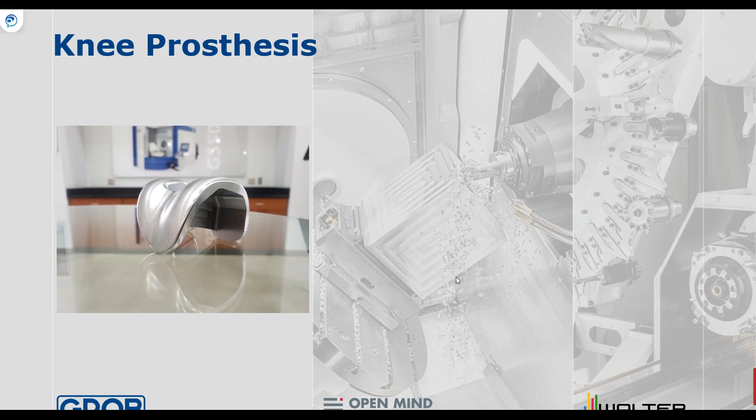For those of you who don't know GROB, we're a German-based company, still family-owned. We have 5 production plants around the world. In the U.S., we have a plant in Bluffton, Ohio, where we have close to 600 employees. We started in Bluffton in the early 80s. At the beginning, it was a small sales and service office, and we've grown through the years to where we are today, which is a full manufacturing site that builds our complete product, all of our product lines that the GROB company offers. Here you can see the overhead view of GROB Bluffton.

It all starts off with sales and engineering. When we get into projects where we require specialized solutions, which is really what we're known for, that's where it all starts in engineering. We have a staff of mechanical engineers, fluids, electrical, software, who all get the project started.

Then out into the plant, we have a full production facility, which is actually fed by our apprenticeship department, which has been in place since the beginning. We actually had one of our biggest classes about 2 years ago with 40 apprentices in a single year. In our production facilities, we're doing all machining, fabrication, painting, so everything from the start to the end, including assembly. We have an application center.

For those of you who are in the medical industry, we realize the long process it takes to get through that verification process, and we have application engineers in Bluffton to support that process. We also have a service team who knows our machines very well. They've built our machines from start to finish, and we recently expanded our spindle rebuild facility in Bluffton.

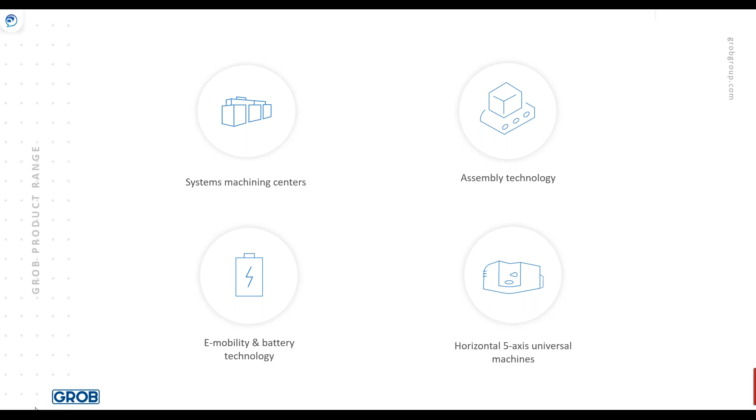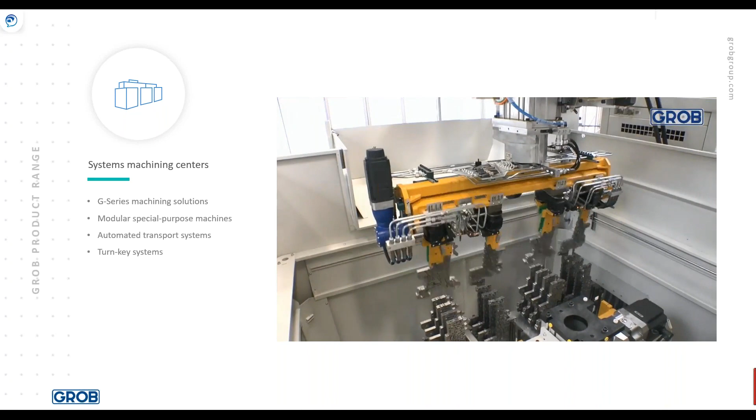Briefly about our different product lines. Our traditional heritage is the system machining line. This is mainly for customers in the truck, tractor, automobile business, mainly powertrain components or suspension components, where they come to us and say, we need X number of parts per year, usually in the tens of thousands to hundreds of thousands of parts per year. We design the complete system from the machines, which can be double spindle or single spindle, any special purpose machines, automation, the turnkey down to the fixtures, the tooling. We will engineer and design all of that.

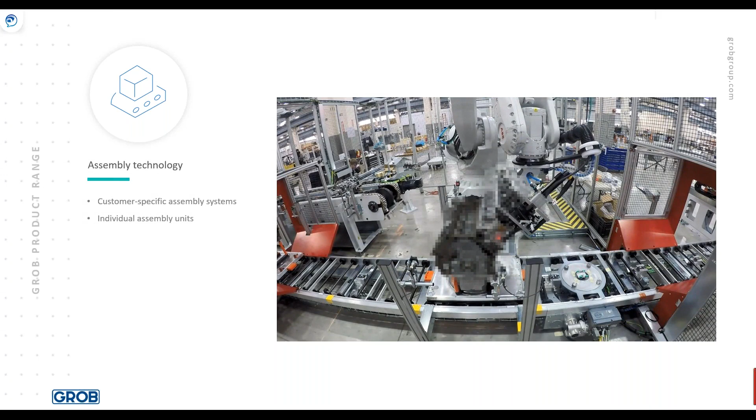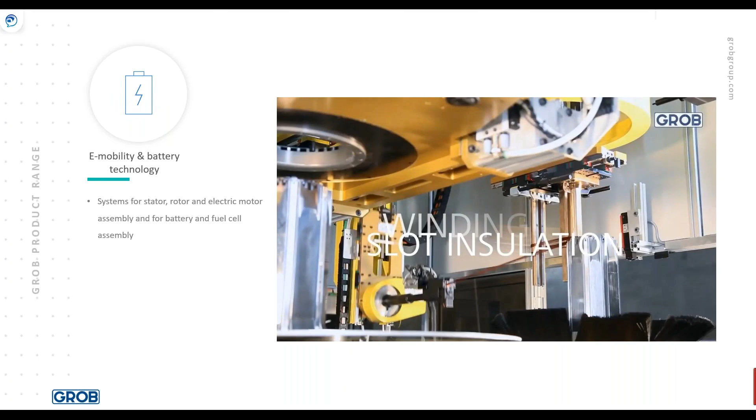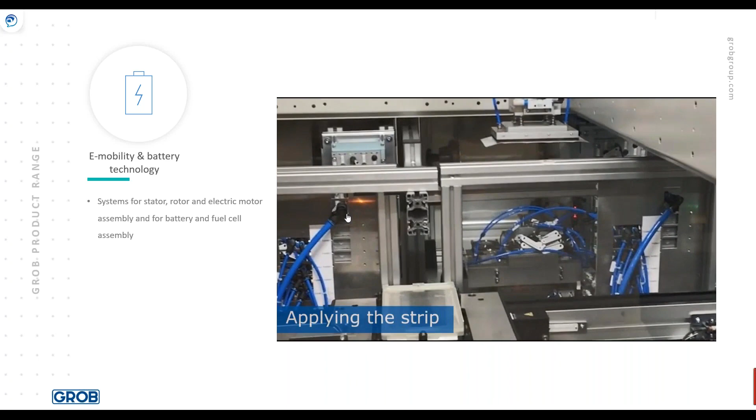That really goes into our next product line, which is our assembly technology. Typically, if you can machine a head or a block, you can assemble it. So it's a very engineering heavy product line that we support our customers with. Recently, we've been getting a lot of inquiries and projects in the e-mobility business. So what that means for us is anytime you have a rotor or stator assembly, battery pack, in the past it was a very manual solution to make these parts. Where GROB comes in is the automation to do it in a high production fashion. So we'll do all the automation for that.

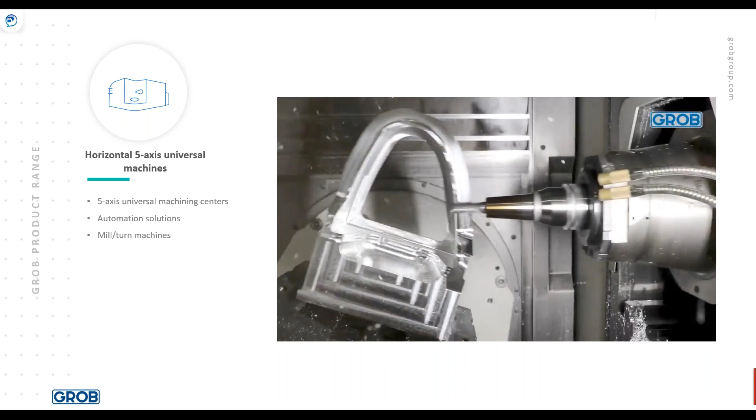Our main topic today is our universal machines, which is our 5-axis line. The one we're using today is a G150, which was recently introduced late last year. Within that universal machine line, we have different automation solutions and also mill turn machines.

So before we get into the technical details, I want to talk a little bit about who we are and where we come from. Open Mind, the developer of hyperMILL, based in a town called Wessling, just outside of Munich, founded in 1994. Over 350 employees working for the company.

Globally, we have 25,000 licenses and 9,000 customers. Together, we have 16 direct country offices servicing our customers. And where we don't have those offices, we also have dealers and partners to work with our customers there.

Here in the United States, we also started in 1996. We take care of the United States, Canada, Mexico, Venezuela, and Colombia. We are direct with our customers, so in most cases no dealer, direct support. Our staff is decentralized, mostly so we can be closer to our customers and also our partners.

So here's our group. Many different people with vast amounts of experience. The one thing we all do have in common is machining experience. So that ties us together, and we use that to help our customers in any way we can.

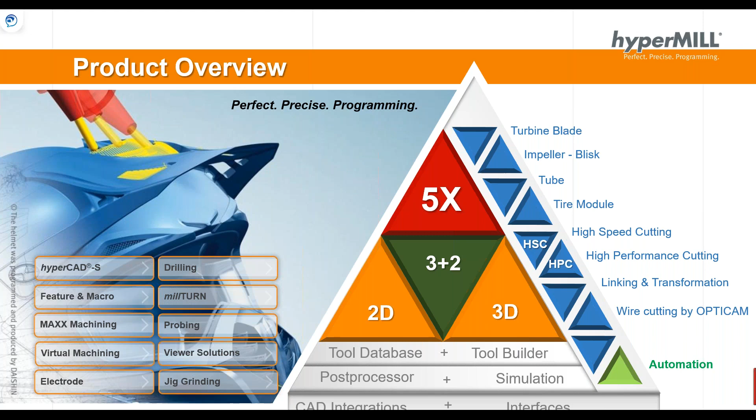So we use these tools to service many markets. As I stated earlier, aerospace, both structural and engine components, medical, which we're looking at today, mold and die, and general machining. All these markets are in our portfolio of customers.

Hello, everyone. My name is Jamie Betcher. I'm the Business Development Manager responsible for the medical market. I would like to take a few minutes and introduce you to Walter and the engineering competence that we have to offer.

Walter was founded in 1919 in Germany by Richard Walter, who was the co-developer of carbide and the inventor of the first CNC grinding machine. You may know some of our competence brands, Titex, Prototyp, and Valenite. We have over 3,500 employees across the globe. We service customers in over 80 countries out of 10 production sites and 27 sales offices.

Our U.S. headquarters is in Waukesha, Wisconsin, and our U.S. production facility is in Cleveland.

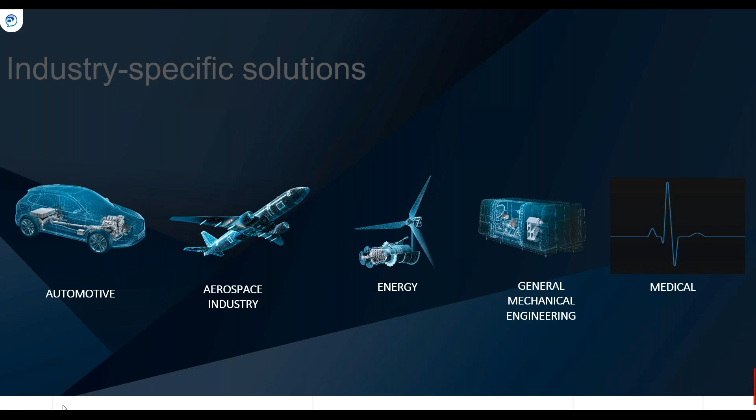We currently offer over 45,000 standard line items, with more than 40% of our products developed in the last 5 years. We can also provide specially designed tooling to fit your needs with 50,000 special line items.

Walter works together with its customers to develop tailored solutions for the complete machining of your components.

The machining process you'll see today was developed by Walter for the maximum rate of metal removal rate and reduced cycle time. We also provided all the tooling you'll see today.

We do not only specialize in unique components, but we can also test and run your components on-site at our technology center in Wisconsin. You can be there and experience firsthand how we develop and test individual solutions for the products that you are producing. We can also offer remote engineering support with our networked intelligent factory that simulates real-world conditions.

We also host training sessions and events. We offer our employees, customers, and channel partners technical training, workshops, and group sessions.

With our production solutions, we are the ideal partner for planning new manufacturing processes or optimizing your existing one. During the optimization process, we review the clamping systems, the CAM program, and provide you with the best possible tools for the operation.

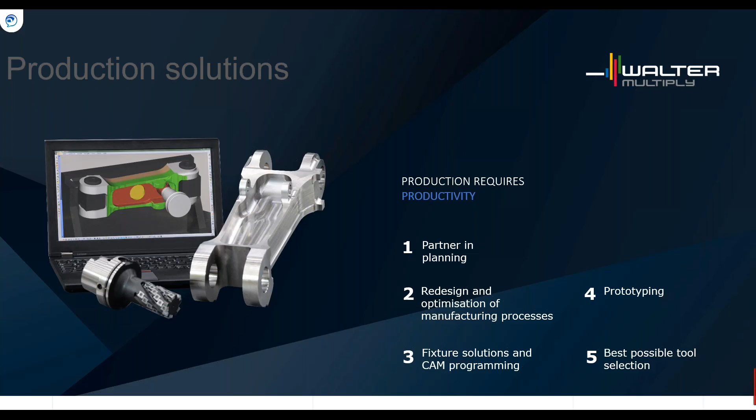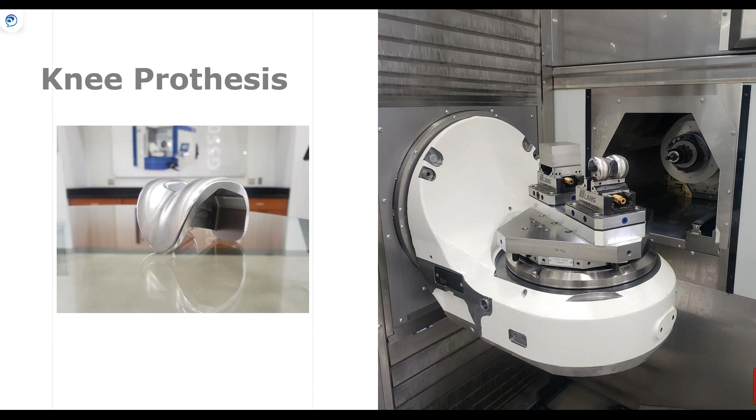So let's get into the demo for today. So we're using a G150, the smallest GROB universal machine. This is a 320 millimeter pallet machine, HSK 63 spindle with 30,000 RPM.

So the part information, just some general things. Material is titanium. We're actually starting from block for today's demo, roughly 3 by 3 by 2 inches. And it does take 2 setups, but we do them both in the part, or in the machine, at the same time. First op on the left-hand side and the second op on the right-hand side. And at the end, we'll be able to tab off the finished piece.

So real quick about the material. Titanium is used in a lot of different markets, medical and aerospace most notably. So the material is selected in a lot of cases for a couple of reasons: strength to weight ratio, corrosion resistance. We also notice a lot of times it is coming from solid block, especially in aerospace, and it is not the most machinable material that's out there, so it does offer some challenges.

So from the machine side, we designed some things to lend very well to machining titanium and these types of parts. One being part accessibility, so we have a large swivel range on our A-axis. So when we have pockets and hard to reach areas, we're able to get to that part. Also, if we have multiple pieces up at once, we're able to do more in a single operation.

Surface integrity, so whether it needs to be a high quality surface or something that's for an implant, that is very important. Thermal stability also plays into that, to be able to have a nice surface finish without any blemishes, we need to have a machine which is very stable. And chip evacuation for those areas which are pockets, so we're not recutting the chips and potentially damaging tools.

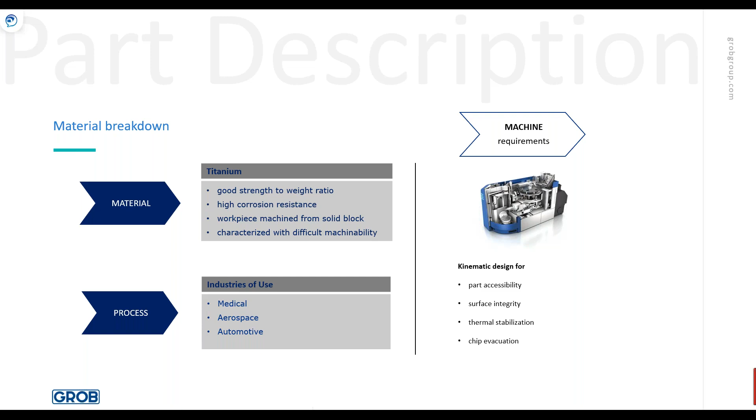Every good CAM system needs a powerful CAD system behind it. In this case, the challenge for us was taking a scanned surface, the organic part of the knee, and turning it into something that we can actually machine. In HyperCAD, we use something called global fitting. That allowed us, with one process, to do a couple things. One, it allowed us to realign the UV lines for a better machining pattern. Also, we were able to remove any irregularities in the surface, so we have a nice smooth surface there.

This part of the knee actually rolls as you move your leg. So having the optimum surface was critical in this situation. Also, if these surfaces come in as different patches, global fitting can be used to join them into one continuous machine surface.

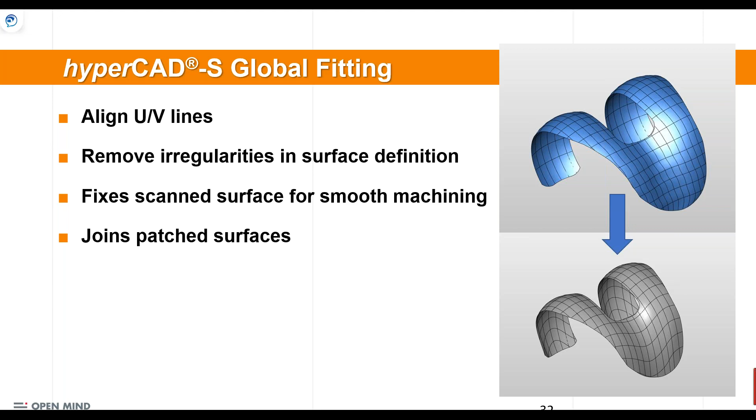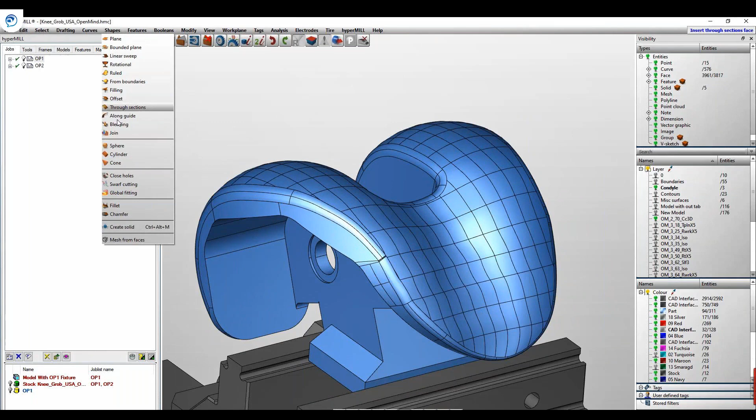So the next thing I want to show you is basically how we do this in the software itself. So you can see here the original surface we got from the scanner. It's a little lumpy. This is just natural in most scanned surfaces. We're going to go shapes, global fitting. Simply pick the surface.

I'm going to make sure that automatic computation is turned on and keep original as off. I'm going to align the UV lines to the y-axis, and also there's some automatic smoothing further down in the interface there that I'm just going to leave as default.

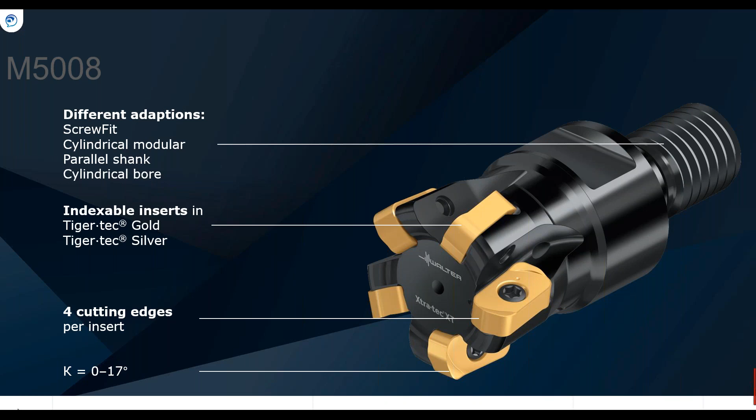We have a couple different geometries available in the insert. The first one, the one we're going to be using today, is F47. You can see it has the more positive rake angle at 14 degrees and just a small T-land up there. The D27 is going to be more of a stronger cutting edge, so it resists chipping and abrasive wear, but it does generate a little bit higher cutting force. And to be perfectly honest with you, what we've been finding is in most situations, the F47 is more than strong enough, so we get a little bit freer cutting with adequate edge protection with the F47 geometry.

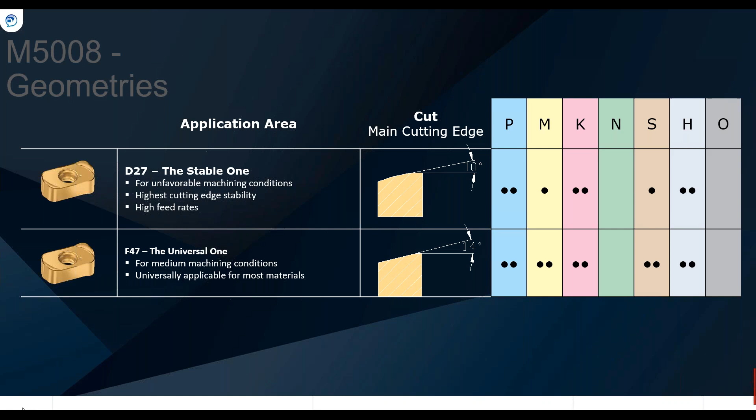Here we're looking at our milling grades for either ISO S or ISO M materials. So you can see on the left of the box is yellow for the stainless steel material, and then it starts to shift over to the brown indicating ISO S, either titaniums or even some nickel-based materials like Waspaloy or Hastelloy or Inconel, something like that.

They're laid out in a hardness to toughness scale. So we have wear resistance or hardness of the insert grade in the y-axis and the toughness in the x-axis. So as we move from left to right, we're going from a more hard wear resistant grade to a tougher grade. And the WSP45S over here on the far range of the toughness scale is what we're using today for the titanium material.

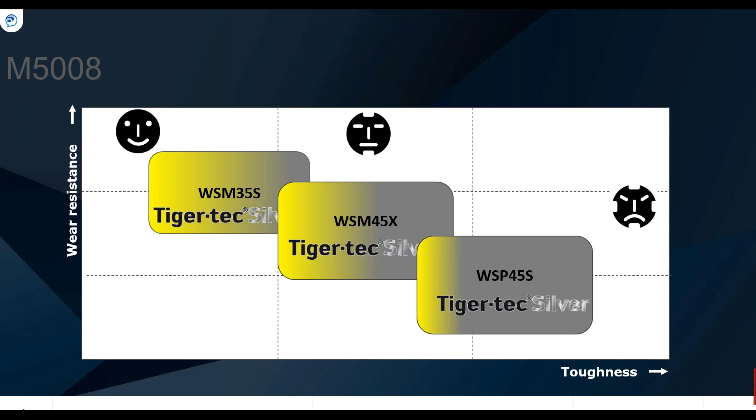We are introducing a new grade, though we're not using it today. It's pretty new, just within the last few months, and we're going to a new insert milling grade platform called Tiger·tec Gold. So the insert will be one uniform color gold, so that helps with easy wear detection. And it's really the next generation of milling grades for Walter. We're seeing huge improvements in tool life, up to and including doubling tool life over our old grade.

Looking at the machine, from GROB we have some pretty unique advantages which are not available from other competitors. One being overhead machining, so being able to flip the table upside down is very advantageous, especially when we start thinking about getting into automation. Being able to keep that work area clean and clear of chips is going to allow for a long unmanned operation.

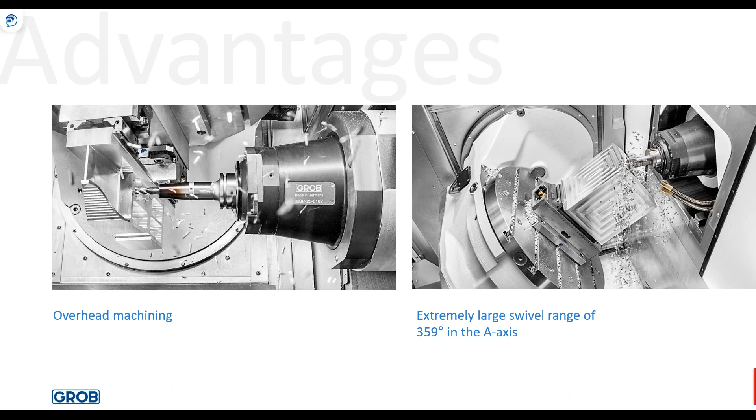Next is we have a very large swivel range on our A-axis. On our 350 and larger size machines, that A-axis range was 240 degrees, but we can actually get up to 359 degrees on our new 150. And that really makes a difference with being able to do more parts on the table at once, or being able to reach those tough areas on parts that require that. So getting more done in a single operation is the key.

Another thing that's unique to GROB is the ability to do the tool change completely out of the work area. So no longer do you have to worry about how large your part is or how long your tool is. The longest and the largest can work together without interference. And our horizontal spindle concept is definitely unique, especially in the G150 size, where GROB is the only one offering a horizontal spindle 5-axis.

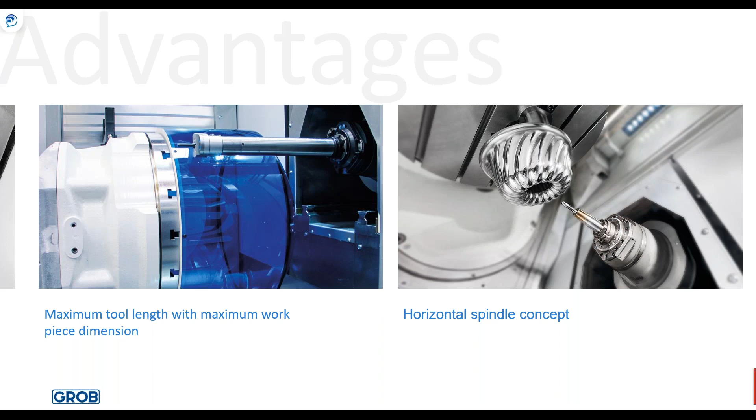So looking at the overall machine design itself, like I said before, we are using a HSK 63 spindle for today. We do also offer HSK 100 on our larger machines. And later this year, we will be coming out with HSK 40 for our G150, which will be over 40,000 RPM.

Another thing to keep in mind, especially on these smaller parts, is being able to have a very dynamic machine. We achieve that by having a dual drive on our Y-axis and direct drives on our A and B. This was something that we realized throughout the years in close cooperation with OpenMind: to be able to drive their very dynamic tool paths, we have to have a very dynamic machine. So we made those changes about 6-7 years ago, along with this guidance from OpenMind.

We also have different styles of tables available. We have mill turntables on the 350 and larger. And we have a dynamic table available on our 350 and soon on our 150, which is a smaller size and a quicker speed. We also have a tandem drive on our 350, but this one is geared more towards blade applications in the aerospace industry. Like I said, the G150 is our smallest universal machine, but it's built on the same platform as our larger sizes, which have been on the market for many years now.

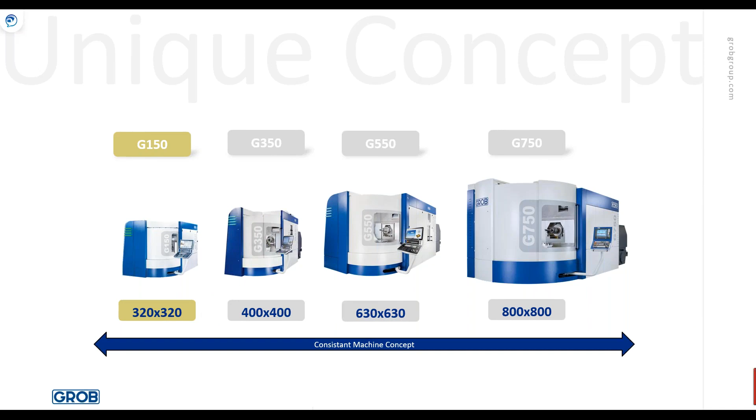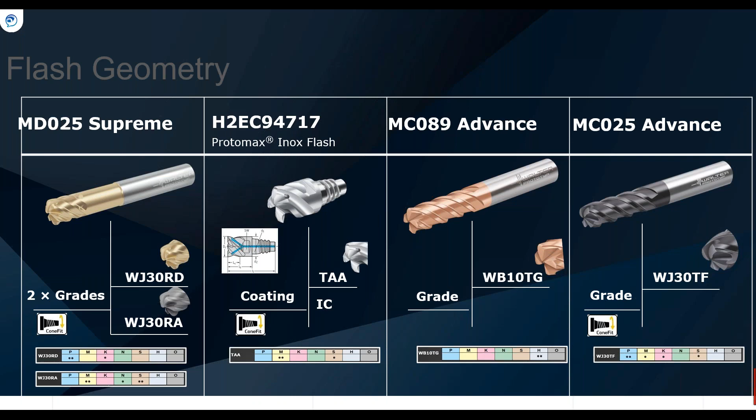Another tool that you're going to see quite a bit of today when we actually show the machining video is what we call a 4-flute titanium series. We do have it available in also 5 and 7 flutes, unequal pitch for reducing vibrations, and a wide range of corner radiuses up to and including ball nose configurations.

The geometry has an eccentric relief on it, so it kind of teardrops or cams away from the cutting edge. This is going to provide a very strong and stable cutting edge, which we're going to need in titanium machining. If you look in the upper right, though, you can see it's not just for titanium. It has a wide range of materials, high tensile strength steels, even a little bit of stainless steel or cast iron material.

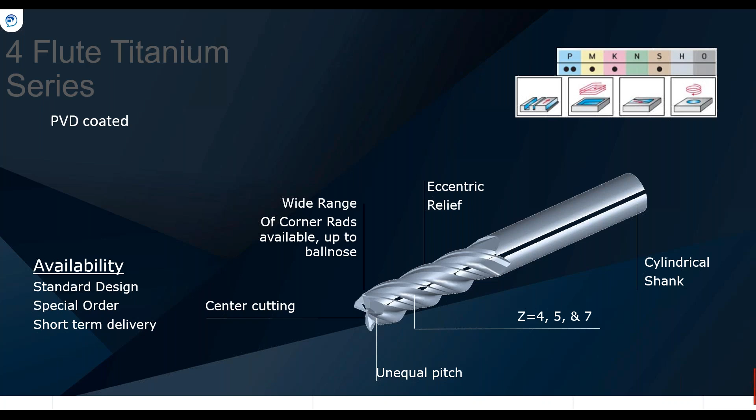Now, it's a little bit tricky because we offer so many different configurations of this tool. We have to kind of manipulate our stocking strategy with this tool. It is a standard design, a proven design, mostly available as a special order, but with short-term delivery. So basically what that means is we're not stocking every single configuration of the tool ready for delivery today, but ready for delivery within a few days. That stocking strategy actually allows us to offer even more configurations than what we have already finalized on.

So if you need a custom shank, whether it's to help prevent pullout or additional holding, additional length, maybe you need a custom coating for the specific type of material you're machining, or to combat a particular type of failure mode, or even if we have to customize the geometry for what you're doing. Because of the stocking situation, all of those options are available to us, and we can really customize the tool for your specific needs.

We offer reconditioning for these tools at the original production facility. That means when we recondition the tool for you, it's reconditioned on the same machine or very similar machine that it was originally produced on, and it gets the exact same coating applied, so you can expect near original condition from the reconditioned tool.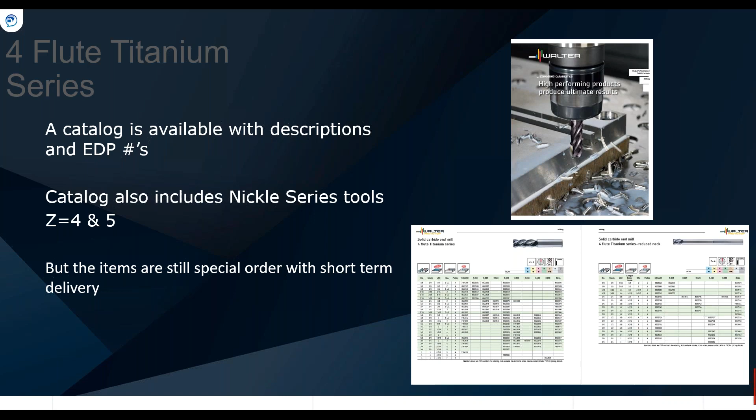Even though it's short-term delivery, we do have a catalog available with all of the standard configurations that we offer, including EDP numbers right in the catalog, so you can easily pick out the configuration of the tool, whether it's 4 flute, 5 flute, 7 flute, the diameter, length of cut, corner radius, and whatever else you need. We do also have in the same brochure a nickel-based series, so 4 and 5 flute tools for nickel-based materials such as stainless steel, or even the other side of ISO-S, Inconels or some other nickel-based material.

We're also using a drill today. The one that was selected was A3389 DPL, which we like to call the Extreme Plus. And this is a very, very strong drill. So this drill does not like to be babied or pushed lightly. It likes to see heavy chip loads because it has a very thick web after centering at the point. The amount of material that's there is quite heavy, and so it's very, very strong.

But if you push it too light, then it just rubs the material and it doesn't perform the way it should. So we really like to push this drill hard, depending on the size of the drill, maybe as high as 10, 12, even 14 thousandths per revolution.

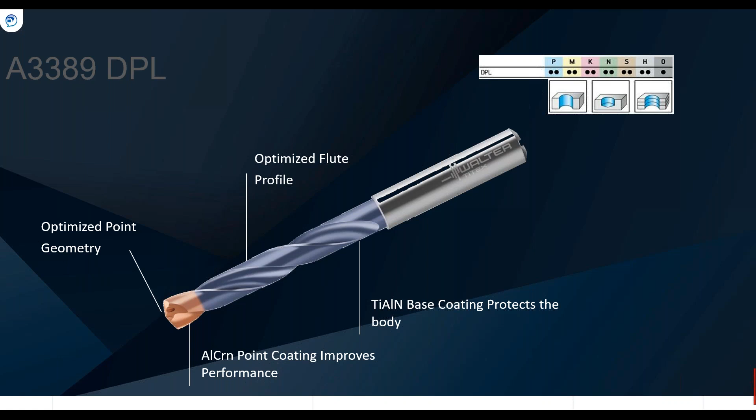It's offered standard in both 3 times diameter length of cut or depth of cut and 5 times diameter. You can see we have a range of 3 millimeters up to 20 millimeters in diameter, and most of the fractional sizes are offered within that diameter range. The diameter tolerance is held to M7, and the shanks are held to an H6 tolerance, so perfect for shrink fit or hydraulic holders or any high performance tool holder.

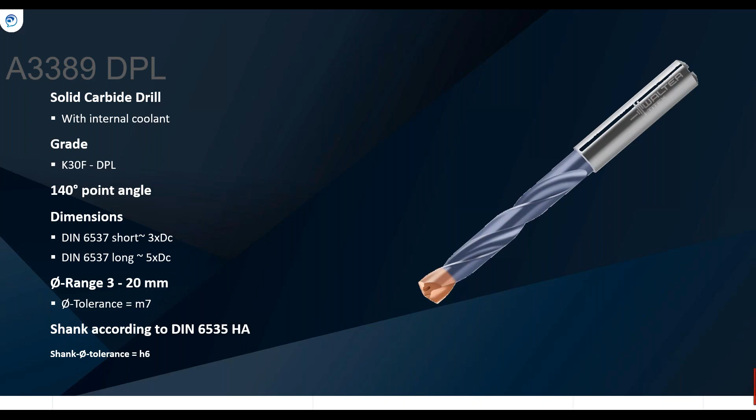When we looked at the geometry for the knee implant, it was pretty clear to us that to be the most efficient at keeping the cutting time low, we had to attack the bearing surface, also known as the condyle surface, with barrel cutters. Cutting it with a ball mill would have just added a huge amount of time to the cutting process. So we were able to use barrel cutters in a way, probably not as traditionally as they've been known for in the last couple of years in more aerospace type components. We're able to use it on a medical part with very good results.

So the type of geometry that we prefer here at Open Mind is something known as the conical barrel cutter, where the actual cutting radius isn't tangent to the shank of the tool. It's actually tangent to an angle off the center line of the tool.

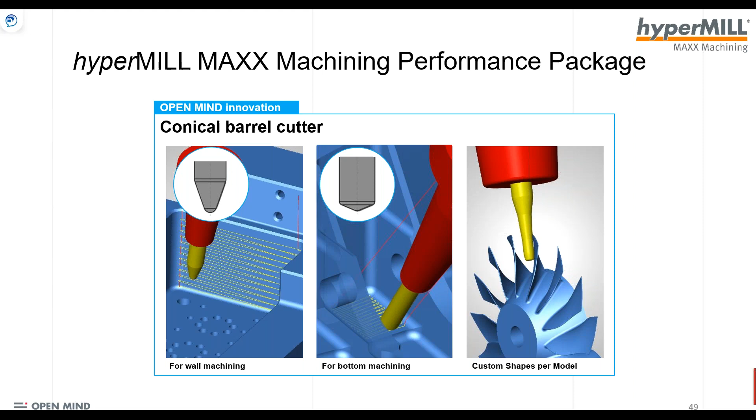So for us, it's important that not only do we have the right tool paths, but it's also easy to use. And part of being easy to use is we have to make it easy to get the actual cutting geometry into the software itself. So when looking at a barrel cutting solution, it's important that it's parametric, so you don't have to fuss around with custom drawings or bringing in DXF files of the tool. Being able to just simply put in the diameters and the radiuses that come from the tooling manufacturer makes it a whole lot easier and quicker.

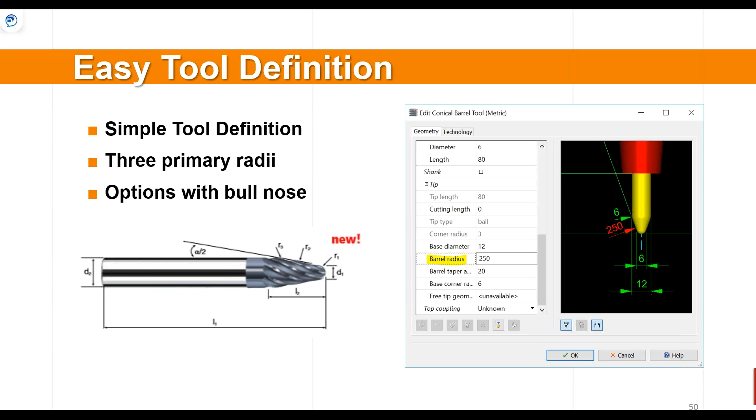So part of having a good barrel cutting solution is having control. One thing that we have in the software is the ability to actually adapt the contact point. Having the ability to adapt the contact point gives you a couple of different options. If you look at the picture all the way to the left, it allows you to actually take the tip of the tool and put it into corners, tight areas that you normally wouldn't be able to fit the tool of that size in. Also, you can adjust the contact point as you go through the cut, essentially giving yourself a fresh cutting edge as you go through the whole process. It's actually kind of a unique thing with barrel cutters. So we found that using these barrel cutters, you get a really good tool life out of them, and they really last longer than you think they should.

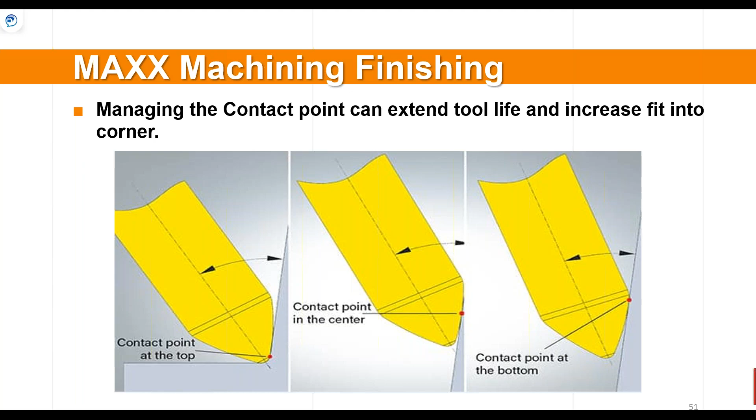And this is what Ernie was kind of talking about. The real advantage of the conical or the tangential style tool or the barrel cutter is the ability to reduce the tool paths. So on the left, we're looking at a traditional ball nose tool to finish the part, and you can see we're limited as to the step over based on the diameter of the tool and obviously the surface finish that we're trying to produce. But with the barrel style tool, we can take a much larger step over, reducing our cycle time by up to 90%.

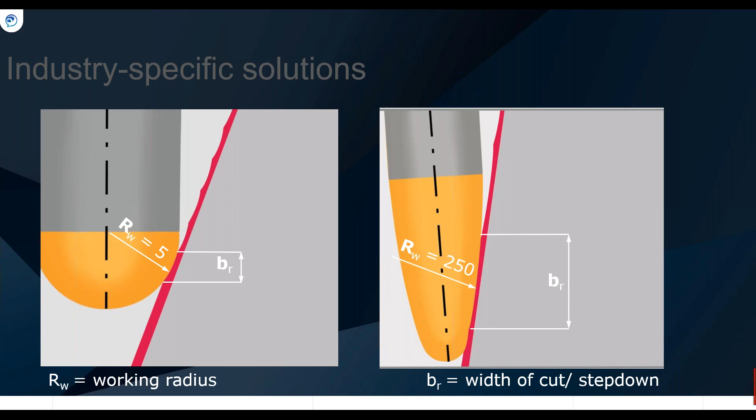And we're already anticipating that due to part configuration, machine capabilities, interferences with fixturing, we're really going to need to customize the tool to the specific application. So we're already set up to custom make any type of tool that you may need, whether it's the barrel style or the lens style or the tangential or conical, and whatever angle of approach you may need to make for your part. We have a system already set up that makes it easy for either our channel partners or our sales engineers to help an end user get a special tool ordered, but the system is already in place.

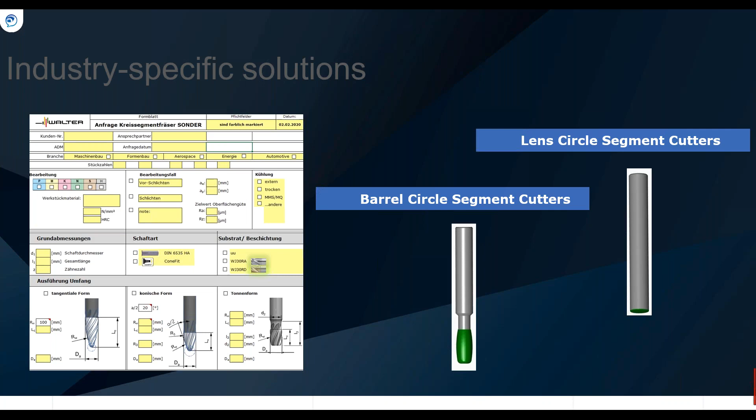Taking the contact point control to another level here, Hypermill has something called dynamic contact point control. And what this allows you to do is with a single click of the button inside the software, as you go through a surface, it will actually dynamically change the contact point. You basically give it a start and you give it an end. And as it goes through the process, you get a new contact point.

And what you get from that is it's almost like a new cutter every pass as you go through the process. Really good for surface finish, really good for tool life, obviously, and a very unique solution, like I said, very unique situation for a barrel cutter.

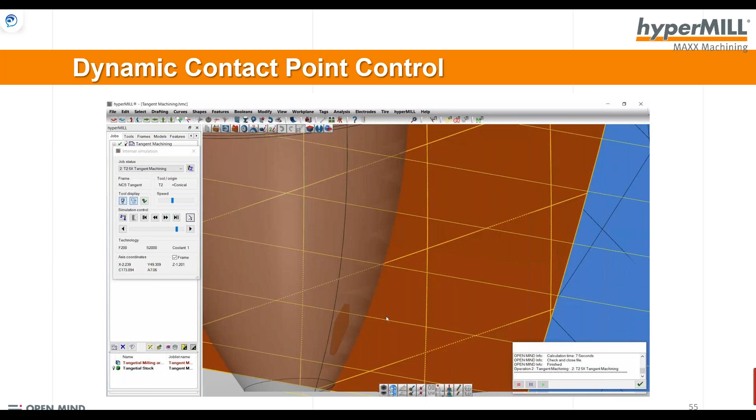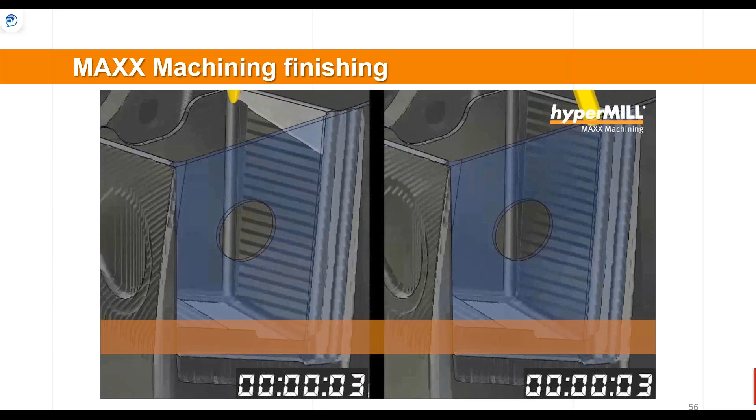So here, obviously the more straightforward benefit is the step down. A little bit of a race between a ball mill on your right and the barrel cutter on the left. You can see on the left we're almost done, even though this is sped up a little bit. There's a little side advantage of the barrel cutter where we can actually put the tip into the corner to get blending surfaces in the transitions.

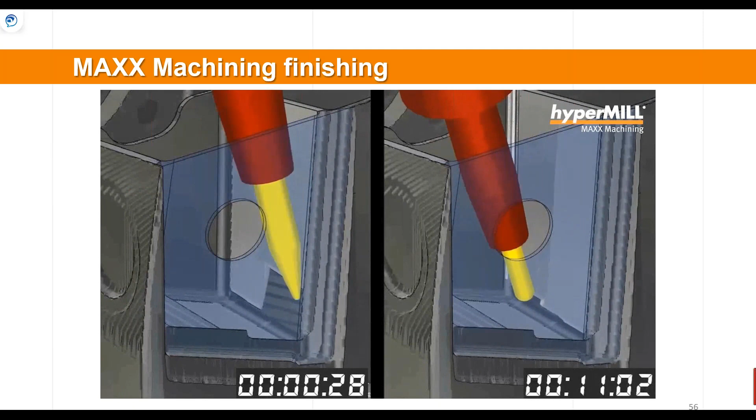We do offer a technology where we can do it in 3+2, where we break the finishing into 2 separate sides and also do the blending with 5-axis. So you see the time difference in this situation. It's just incredible.

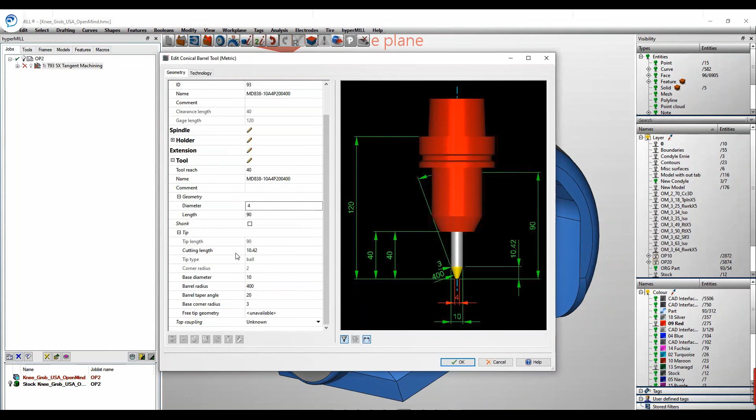And now, just to show you how easy this is, we're going to do it in the software itself. Of course, everything that looks easy is backed up by an incredible amount of math and an incredible amount of technology and thinking. Here, we're showing the interface for selecting the tool, the barrel cutter, everything parametric, like I mentioned earlier. On the strategy tab, we're going to switch to global drive shape. You can see we have some other options there as well.

I think the video's stuck.

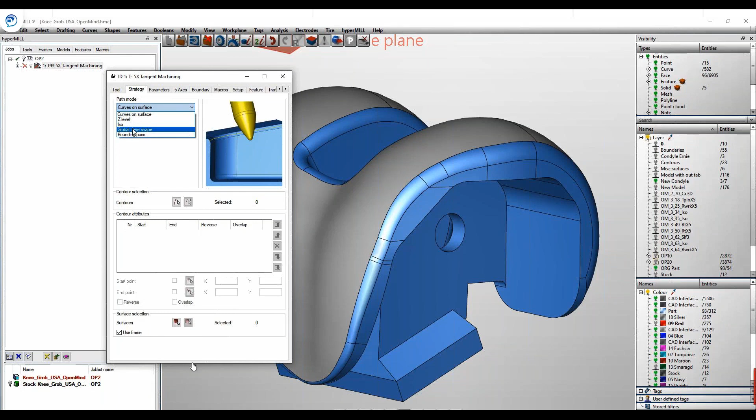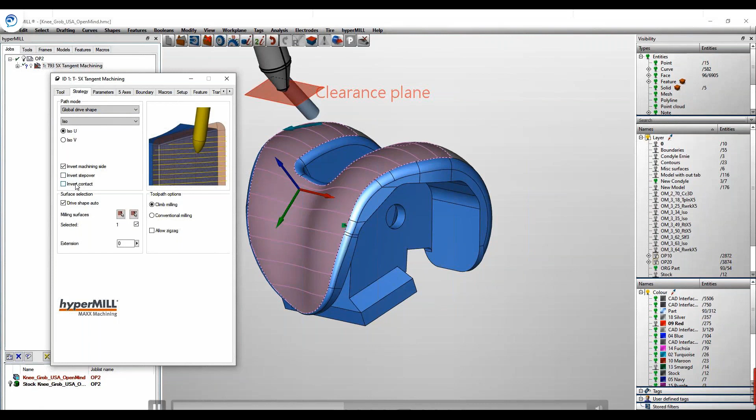There we go. And then we're going to pick a surface. So we're just going to pick the surface we're going to cut, condyle surface. It's going to realign the UV lines, but we can change that here if we want to go the opposite direction. I can invert the machining side if I want. I have a little graphical representation of the tool, so I know which side we're going to be machining on and which direction we're coming in.

Switching the parameters, I can give it a side allowance. I can give it its own semi-finishing path if I want. And the 5-axis, simple and straightforward, just follow the ISO lines. There's several other options there. There's my contact parameter, where I get 20% up the tool. That's how we turn on the dynamic contact point. And also we have an avoid collision option as well.

We calculate. And we should get some green lines here showing you the temporary tool path, and then it'll be all linked together. A nice smooth tool path with yellow lines. Since we're climb milling, it's gonna, oh, I guess it didn't finish, sorry.

Sorry about that, Ernie. That's okay.

Moving on to the machine. So looking at our cross-line Z-axis design, this is also unique for a couple factors. First off, on a GROB machine, the distance from the spindle to the bearing of the Z-axis is always the same since the bearings travel with it. Typically what you see on a vertical is as you come down to the part, you're extending those bearings, which leaves you less rigid. On a GROB machine, you have 3 sets of bearings on the Z-axis. If you compare that to any vertical out there, it's 2 sets, so that's an obvious improvement.

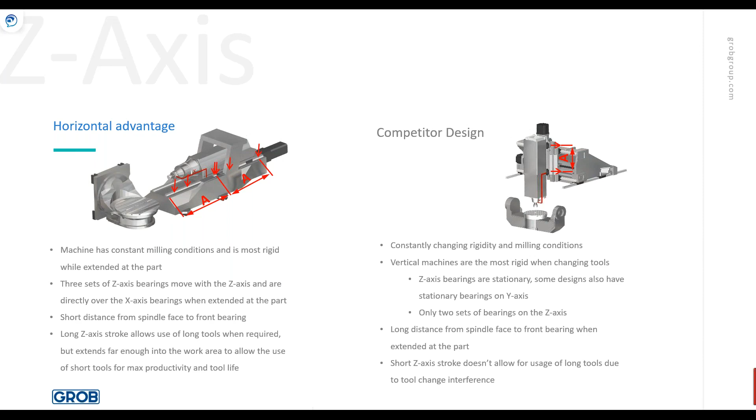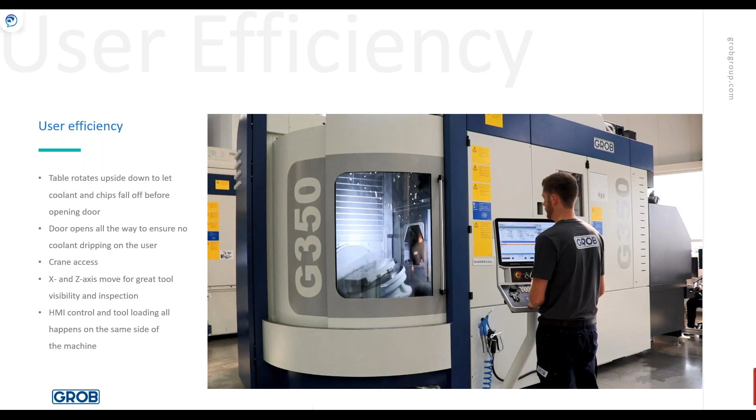So some other key benefits on a GROB machine is the user efficiency. Being able to rotate the table upside down, dump the coolant and the chips off is very nice for automation and also for your operators if you're doing a standalone operation. Also, the door opens completely, including the roof, so it leaves it open for the crane to come in. And also, if you're going inside, you're not having coolant drips on your head.

Also, you can bring the X-axis and Z-axis close to the operator to inspect tools. And also, if you look over on the right-hand side, the tool loading point is right there by the operator, which is in the perfect position.

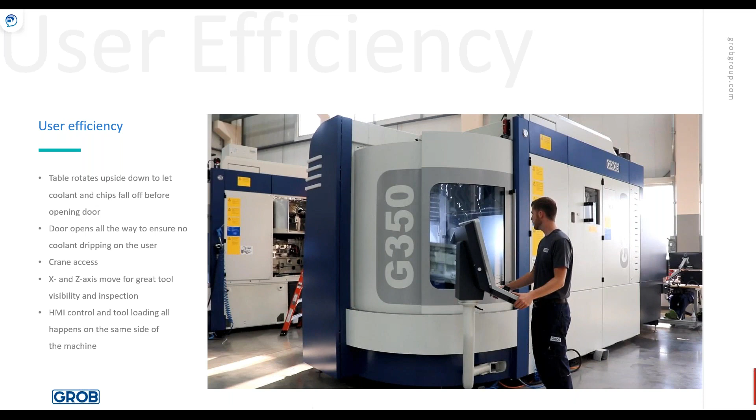So the last thing I'm going to talk about today is some tools we have for achieving a high surface quality.

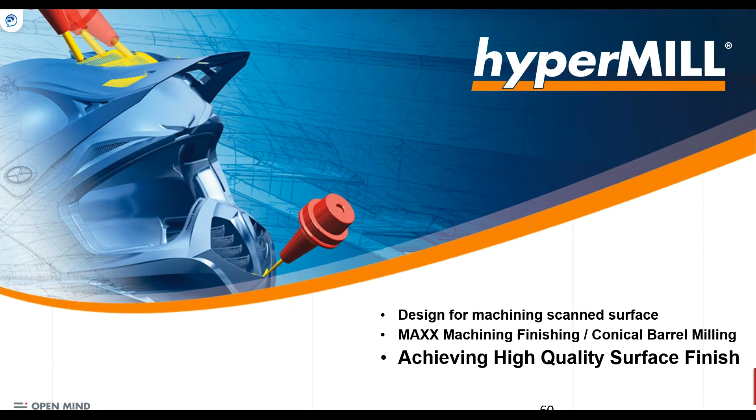The first one is something we call high precision surface mode. Just a little background information: most CAM systems, whether you know it or not, take a part and typically create a faceted mesh model of it. This allows the software to make sure there's no gouges and no gaps between the surfaces, and then the tool path is applied to that mesh model. Of course, the downside is it's faceted, so you're going to see those facets on the surface.

hyperMILL has some technology built in where we can essentially take the tool path, project it onto the real surfaces, but also check against the faceted model in the background for safety reasons. This is a very simple solution - once again, one checkbox, but with a lot of math and technology behind it.

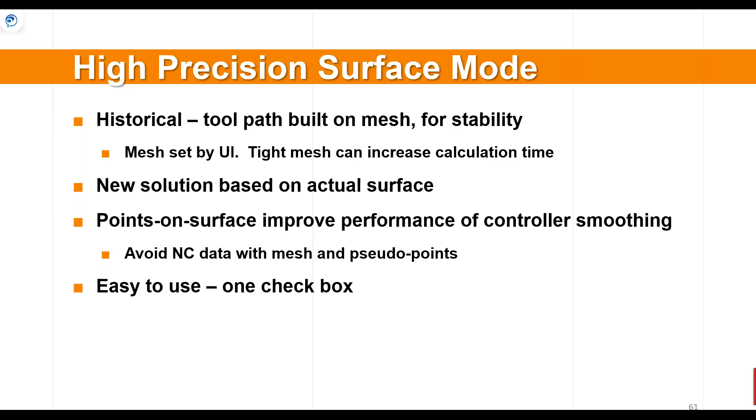The second technology I want to talk about is our smooth overlap technology. This allows us to take either multiple sections of tool path with the same tool, or maybe even two different tools, or perhaps even a tool in one orientation and another in a second 5-axis orientation, and blend between those tool paths. It's not just a simple extension of the tool path - there is an actual blending of the tool path into the adjacent areas.

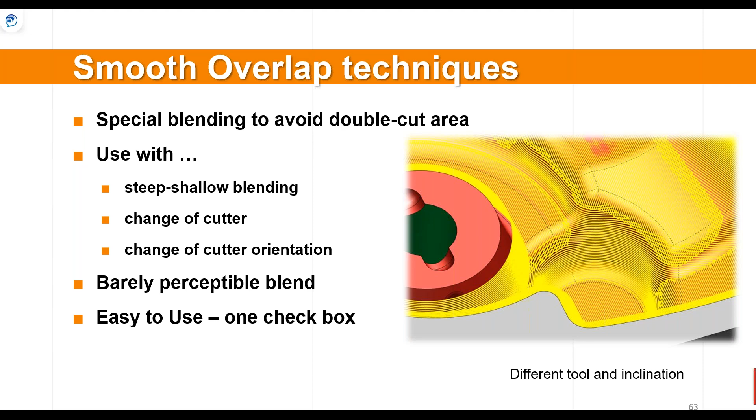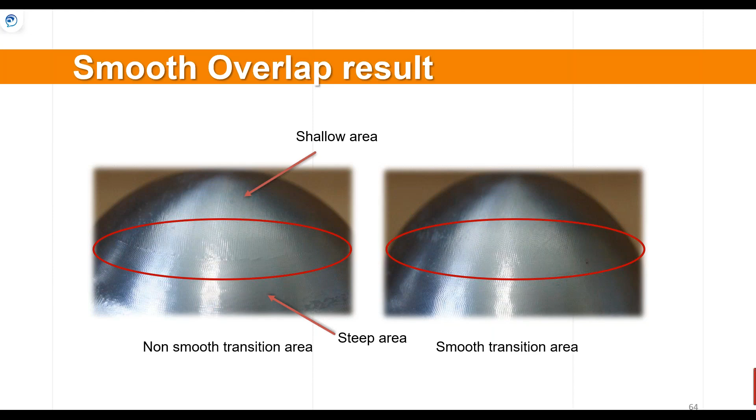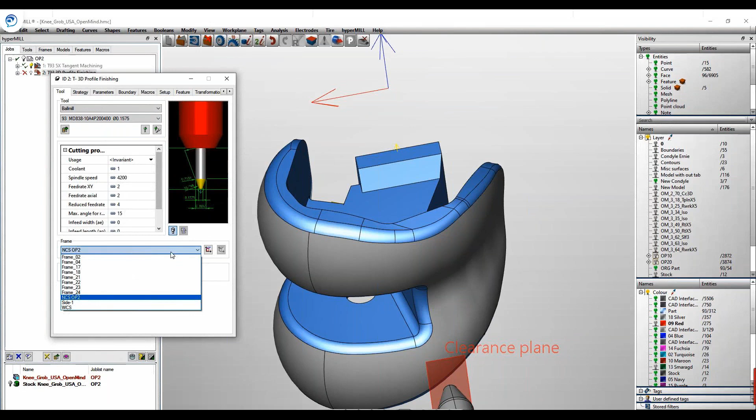So here in the software, just real quickly, we're going to machine these side surfaces here. I'm going to select new 3D milling profile finishing, and grab a ball mill. In this case, we're actually going to use a barrel cutter, and we're going to use the tip of the barrel cutter, which is another benefit of a barrel cutter - it really serves two purposes.

On the boundary tab, I'm going to pick the surfaces I want to cut. This is a very quick, simple example. In there, I can also do a smooth overlap, as we're talking about. There's also an extension option where it visually shows you extensions, but that's not what we're going to do. We actually want the smooth overlap, which will actually roll the edges.

So first, we're going to calculate it with it off. If you zoom up to it, you can see that the tool path goes right to the surfaces we picked, which makes sense. Now we're going to turn the smooth overlap on and recalculate it. You should be able to clearly see that the tool path now overlaps a certain amount, but it doesn't just go straight off the surface - it actually rolls over the other surface. There is actually a small transition angle to that as well, so it's not just going onto the other surface, it's really feathering itself to the other surface, which is really nice.

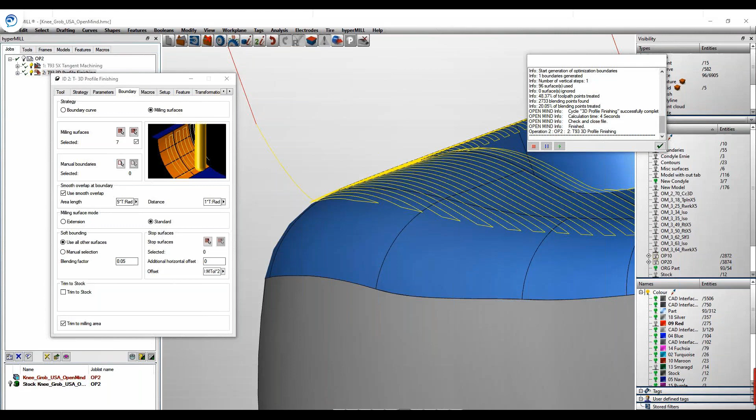So looking at being able to get at all the surfaces of the part, one thing that's critical is the design of the spindle and the table. Having a symmetrical design that allows us to get right up to the part using short tools is critical. Also, if we look at the distance from our center line of rotary to the front of the spindle while the Z-axis is extended, it's a very short distance, around 2 inches on our G150. It's a little larger on the 350, I think about 3 inches.

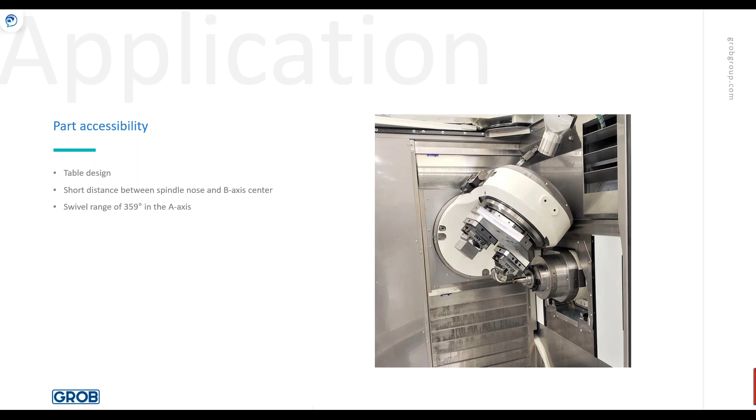It still gives you a short distance. By the time you add a tool holder in there, you're easily getting past center line even with a short tool. And then here you can obviously see the extended range on the A-axis - up to 359 degrees, which allows you to get at those points in a single operation.

Surface finish, as Ernie had mentioned, is critical for parts like this. Some features that we incorporate support that.

We can do all the tool measurements on the machine with a Blum laser, and also we can do scanning just to verify the tool is what we think it is and make sure it's as accurate as we have in the cam system. We have torque motors on the rotaries, which gives you a fast and most accurate transition, without dealing with any backlash issues. There's also an effective cooling system on the whole machine to overall keep it stable and machining a good part all day long.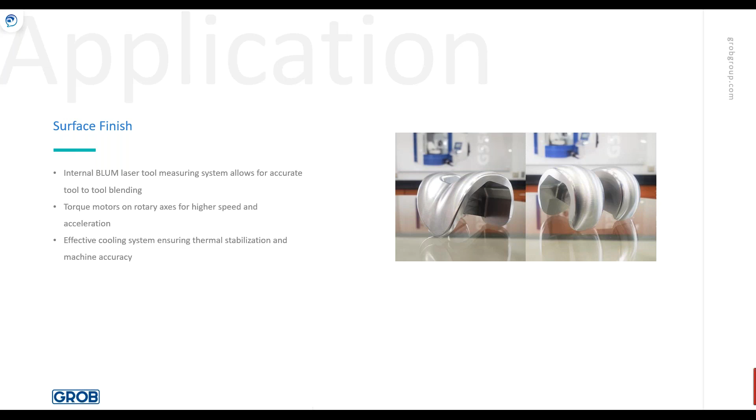So with that, we're going to get into the demo video of the knee.

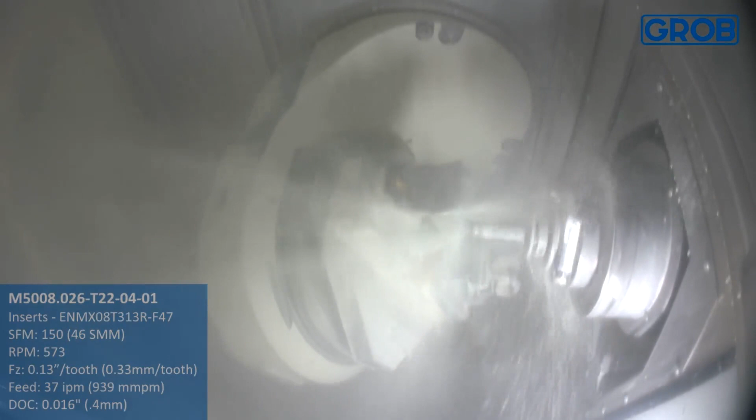First off, like I mentioned before, we're starting from a block, which is not going to be typical for this type of part, but we'll do the trick for today. So we have a lot of material to remove along the outside to get it to that near net shape. Also on the inside, there's a lot of material which we have to get out. Here we're using a 1-inch high feed indexable cutter from Walter.

I really like the idea of starting the roughing process with a high feed mill. It's a really efficient way to get a lot of material away quickly. But here we're looking at that 4-flute titanium series tool. You're going to see a lot of different configurations of the same geometry being used on this part today.

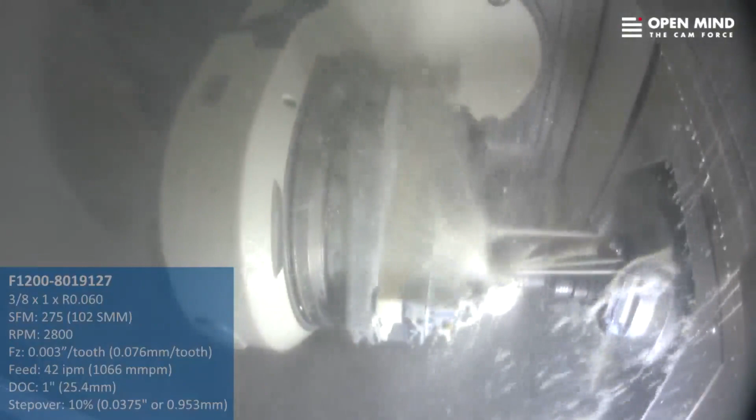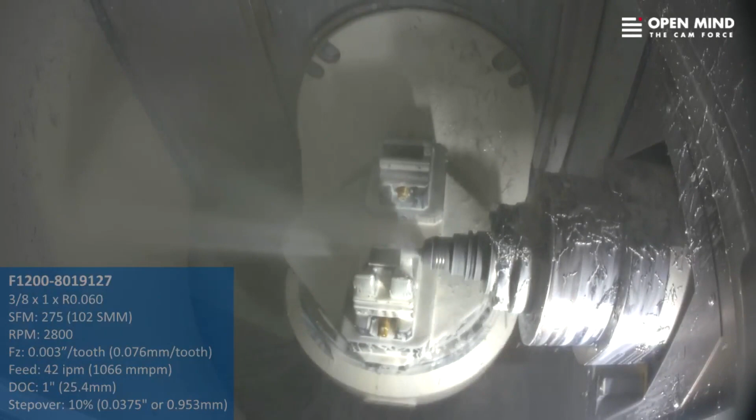Toolpath wise, in this situation, we're using a combination of our optimized 3-axis roughing as well as some 2D toolpaths. So that strong base of software, not just 5-axis, not just barrel cutters, but general toolpaths as well. Collision checking against the machine, the tool, the fixture, the holder, everything for process security throughout.

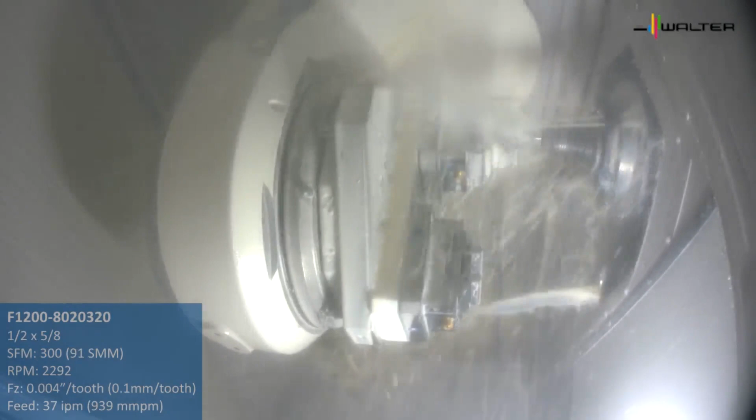Here's another version of that 4-flute titanium series. As I mentioned, the tool design has an eccentric relief on it, which provides a very strong, stable cutting edge when you're in this difficult to machine titanium material that usually generates quite a bit of cutting force pushing back on that tool.

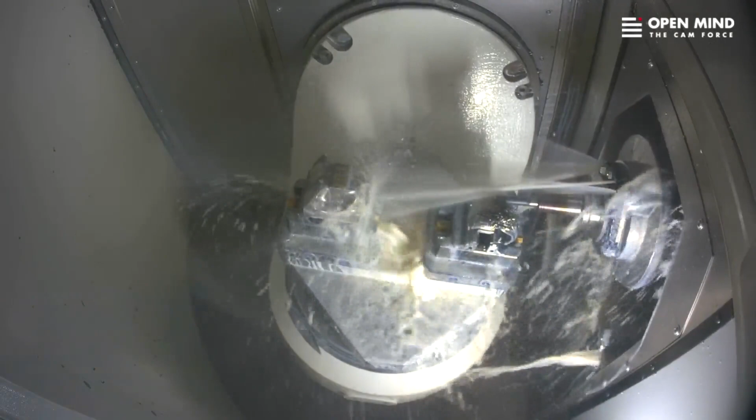At this point, we're going to switch to our max roughing toolpath, where we're using a trochoidal style cut to clear out the slot in the knee itself. You see all the chips, a lot of material removal, quicker material removal, highly dynamic. Here we're actually using the same cycle we use with the barrel cutter, but with a standard end mill.

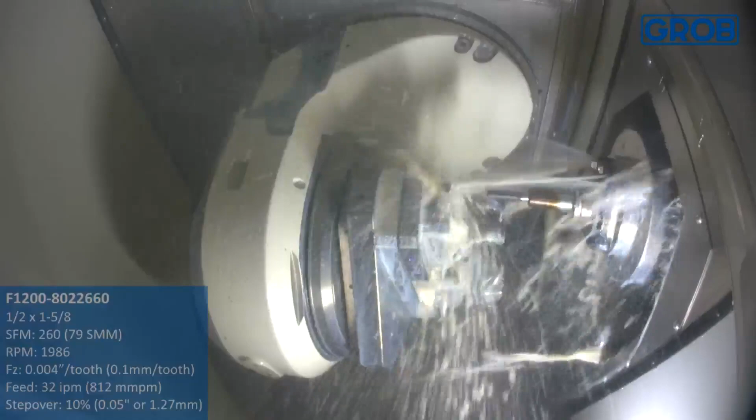You'll notice all the repositioning moves, once we're in the cut, are staying right up against the part. So we're repositioning at 5-axis, which is very dynamic with the tool path and the machine.

We'll also look at this 5-axis swarf cut on the outside of the part here. We'll be able to take a pretty large step down while still being very close to the final surface, so we have a very consistent semi-finished pass, which is going to be critical for having an accurate finish.

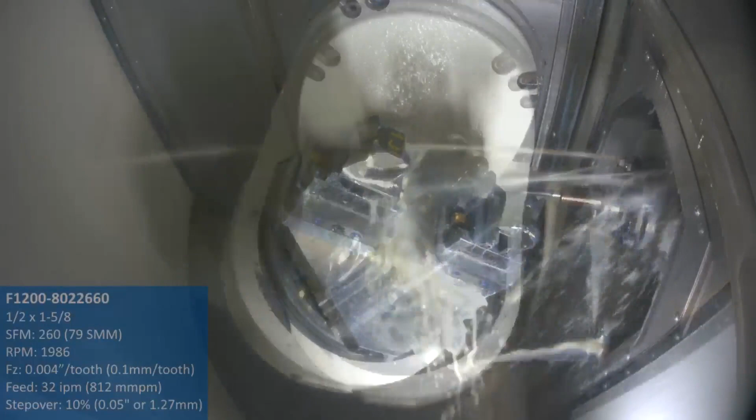Here we're switching to finishing. We're using a ball mill to finish the sides, just like we did in our last example, making sure there's a smooth transition from the sides to the condyle surface, the bearing surface of the knee. We don't want any burrs or inconsistencies in the surface from the transition of those two surfaces.

Now we get to the barrel cutter. You can see it's a fixed inclination with mostly C-axis motion, and we're going to work our way up the surface, making sure it's nice and smooth. Climb milling as we go, which is always preferred with a barrel cutter. Very good motion on the GROB, nice and smooth, and of course, good chip evacuation as well.

Here we're again coming back to the 4-flute titanium series tool for doing some of the finishing applications. When we did the finishing with the MD838, keep in mind that's the conical version of the barrel cutter and not the tangential. There's a difference in the application between the two and the capability of both different styles of barrel cutters.

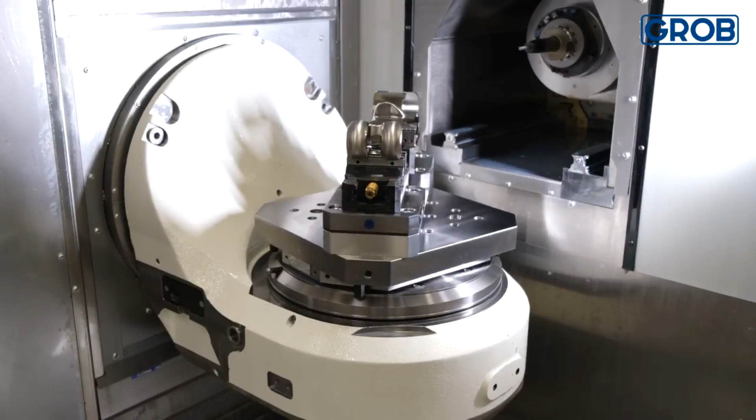Lastly here, we're looking at doing all the fillets and blending on the outside of the part. We're actually using a barrel tool, but using the end, which is a diameter 4, so it still makes for a very stable tool using a barrel for that application.

So at the end here, you see everything's finished. We have one part roughed, the other part is finished, and now we're able to do the part off. And now some images to show the finished part.